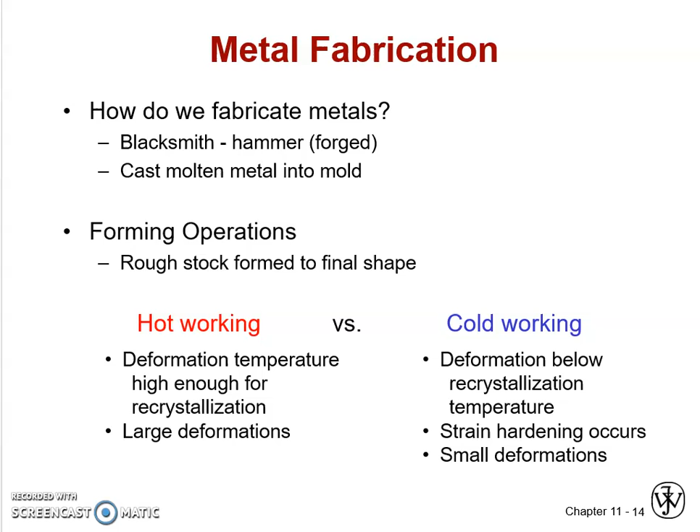Okay, however, in cold working, the deformation process is below recrystallization temperature. Strain hardening will occur, but it results in a small deformation. So that is the difference between hot working and cold working. Okay, this is how you fabricate a metal, whether by forming, that is hammering or stamping. It can be used for wrenches or crankshafts. Means that you put it in a die and you apply a force to it.

Or a drawing method. Drawing, either you want rod form, wire form or tube form, where you force, you pull the metals. Okay, you pull the metals, so we call it drawing process. Or rolling, you roll the metals for making beams or rails. Rails or plates or sheets, you do rolling, either hot rolling or cold rolling. And also extrusion to make rods or tubes. Okay, you do extrusion.

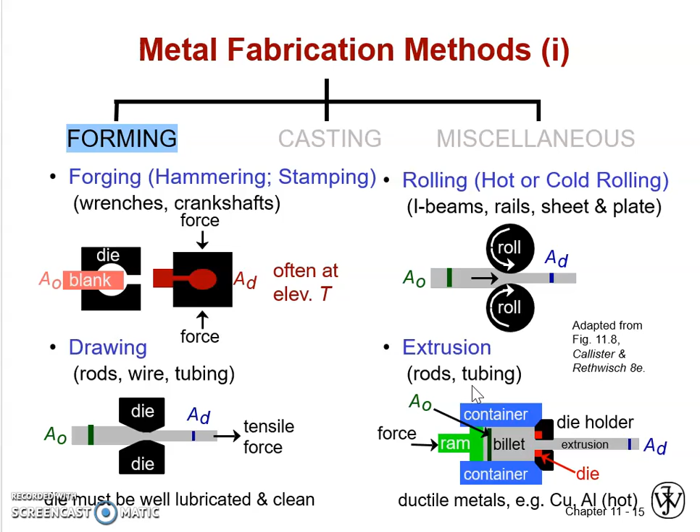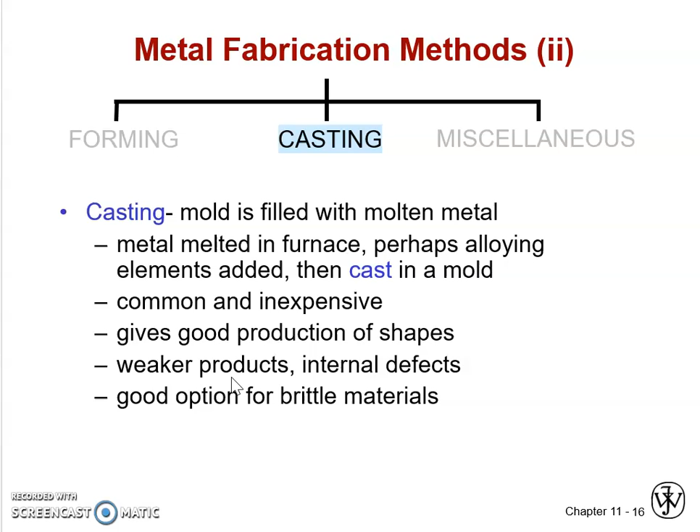And then you can do casting as well, meaning that you put it in a mold, and you melt it in a furnace first. So you have to have liquid metal first before you put it in a cast. Basically it is a common process and inexpensive. It can give a good production of shapes, any shapes that you want, but it will result in weaker products because they will have internal defects. But this is a good option for brittle materials. You can just pour it in the mold, so we call it casting process.

And there is a type of casting, sand casting. If you remember your workshop subject, I think you will do this. There is a mold that has sand in it, you put sand within that mold, and then you put in the molten metal, so you get the shape that you want.

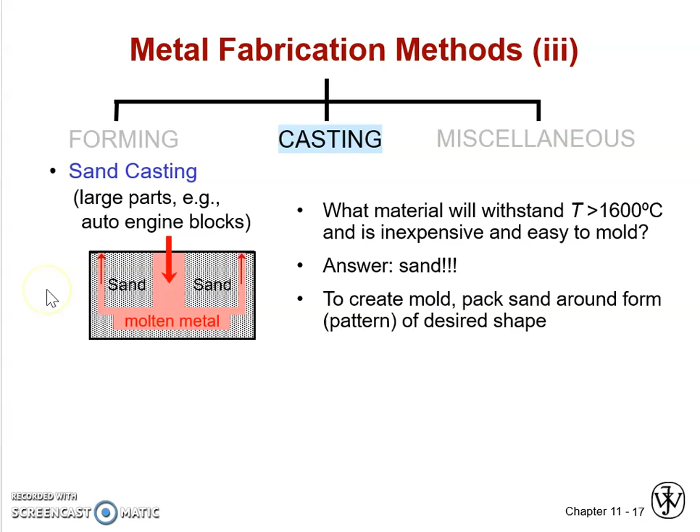So why do we use sand? Because the sand can stand high temperature, because you know this molten metal is very high temperature, more than 1600, and only sand can withstand that temperature. It's also inexpensive, and it's easy to mold, meaning that you can just put it in the mold and it can follow the shape that we want. Okay. This one I think you can read yourself. And there are miscellaneous processes in metal fabrication, powder metallurgy or welding.

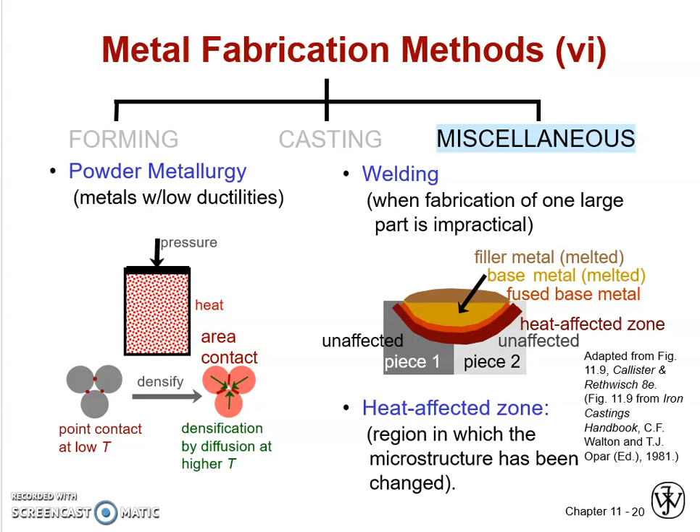Okay, and here this is how you process metals. So you've got a metal, and you want it to have the properties that you want. Now you already have your metals in solid form, but you want to anneal it to have the properties that you want. So first you can do annealing. Annealing means you heat to a temperature, we call it T anneal, and then you cool slowly.

There are types of annealing. First is stress relief. Stress relief means that after you do a molding, forming or casting process, there will be stress inside the metal, right? The stress comes from plastic deformation or non-uniform cooling, that is you heat your metals but the cooling is non-uniform, so the metal will have stress. The stress also comes from the phase transformation from austenite to ferrite to cementite. All of them result in stress. So if you want to release that stress from the metal, you do annealing.

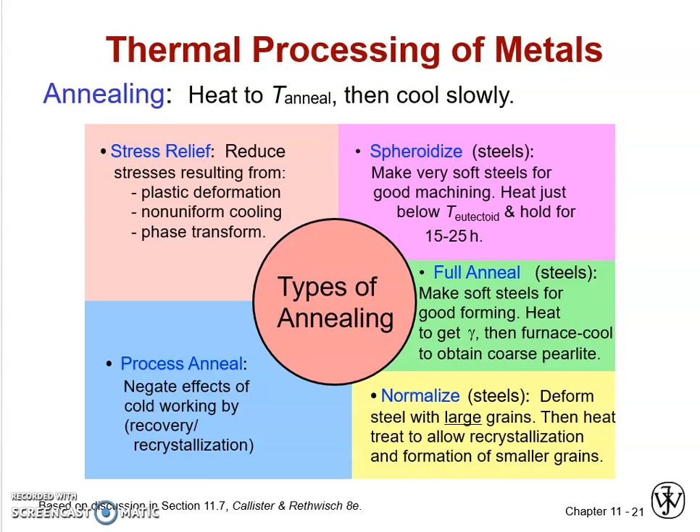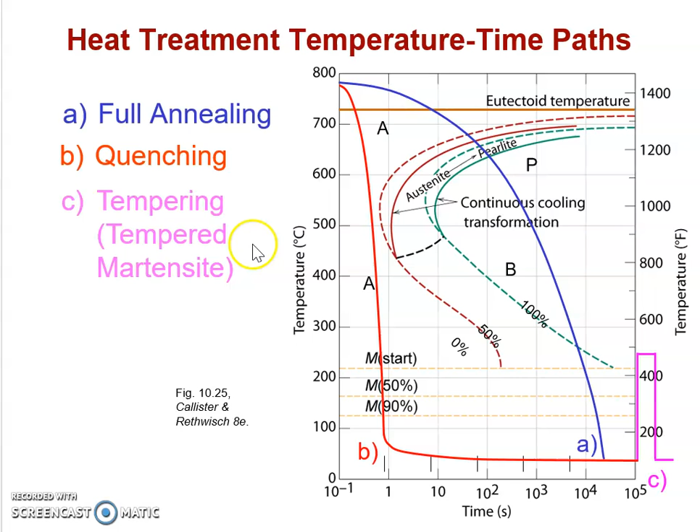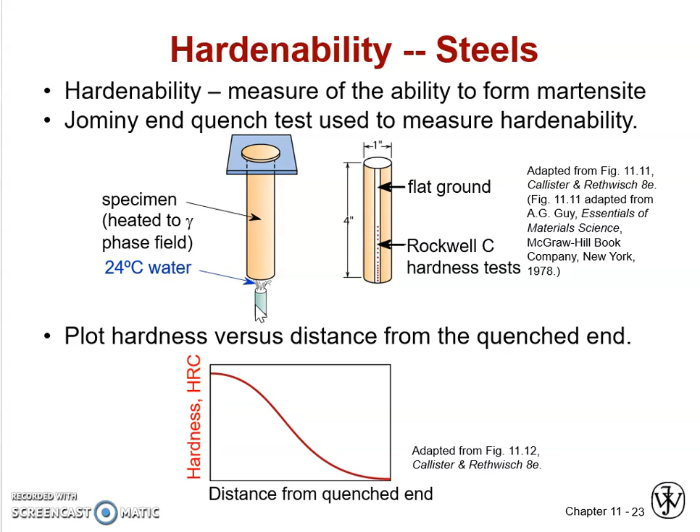Okay, now the reason why hardness changes with distance. So like I said before, if you go back to the TTT diagram, here is the steel. Okay, this is the water jet. The water jet at this point means that the distance is very near to the water jet. So at 0 inch, which means that the water jet is very near to the steel, you can see from the graph that the steel forms 100% martensite.

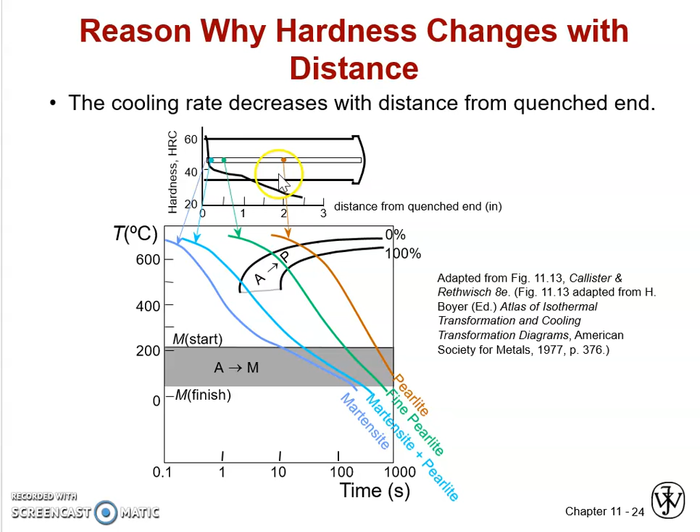So as the distance gets far away from the water jet, it will touch pearlite. Okay, so the steel has martensite and pearlite, which means here the hardness becomes lower. Okay, this is the graph of hardness. The more distance from the water jet, the lower the hardness, because they already got fine pearlite. So now you can see the lowest hardness, which is here, you will get 100% pearlite, where the distance from the quenched end is very far. So it will not form martensite.